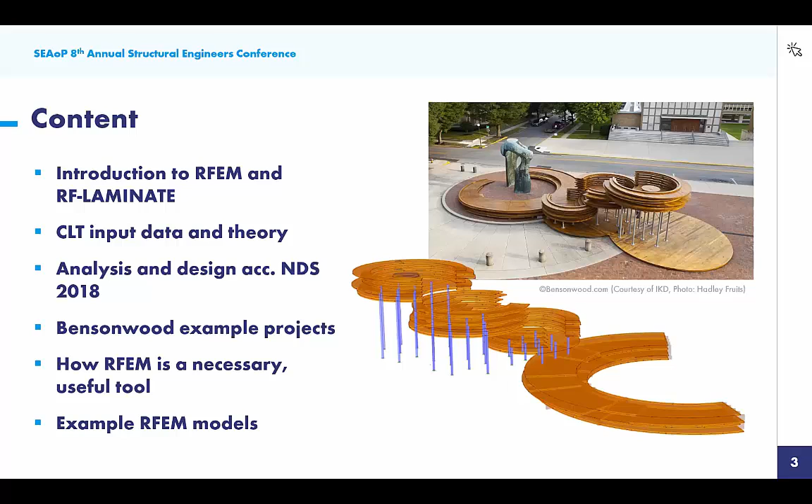Then I'll turn it over to Florian, who is an engineer at Bensonwood, to show you some real world applications of cross-laminated timber, mass timber, with some example projects that they have worked on. He'll go on to talk about how they found RFEM to be a necessary and useful tool in these projects and go through a few example RFEM models as well.

So I am going to go ahead and begin within our program RFEM. You can see that this is the main structural analysis program here, RFEM. It will provide a full analysis, so things like internal forces, deflection, support reactions. We work with this add-on module concept to provide design of our elements, and today we'll be looking at RF-LAMINATE, which provides design of cross-laminated timber.

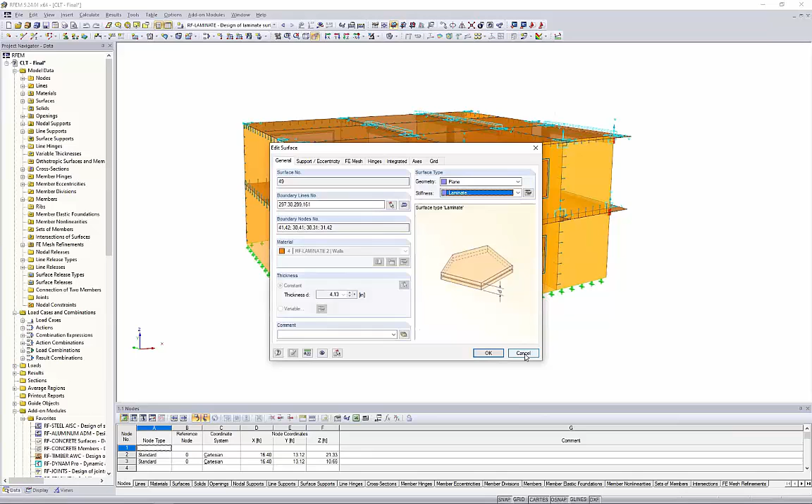For the sake of time, I have already modeled a two-story structure here, and you'll notice that we have several surfaces, and if I double click on one of these surfaces, the stiffness type is set to laminate. This refers to our RF-LAMINATE add-on module, which we'll get into in just a minute, on how we can accurately calculate the stiffness properties of CLT panels.

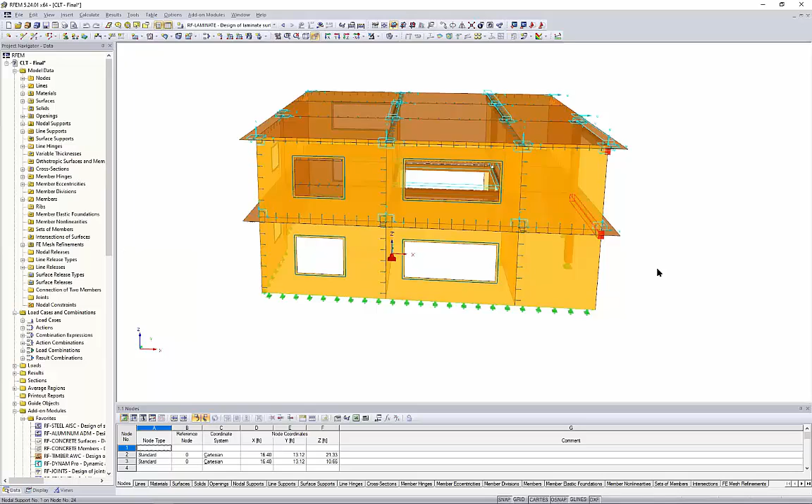I've also combined this with member elements. So you'll see here glulam beams, which are dropped down below the bottom of the surfaces for additional support. We have some glulam columns as well, all within the same project. I've also applied loads to this structure. These are just general surface loads.

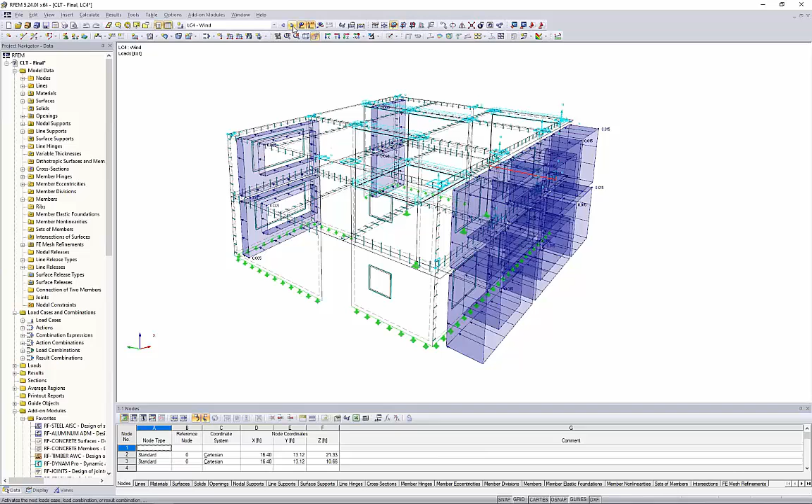Maybe if I turn this to wireframe, it's a little bit easier. We have a dead load applied to the first level and the roof level, a live load, a simple snow load applied at the roof level, and then a lateral wind load. I combined all these load cases into load combinations according to ASCE 7. So when we display these together, you'll see the gravity loads in addition to lateral loads acting on the structure altogether.

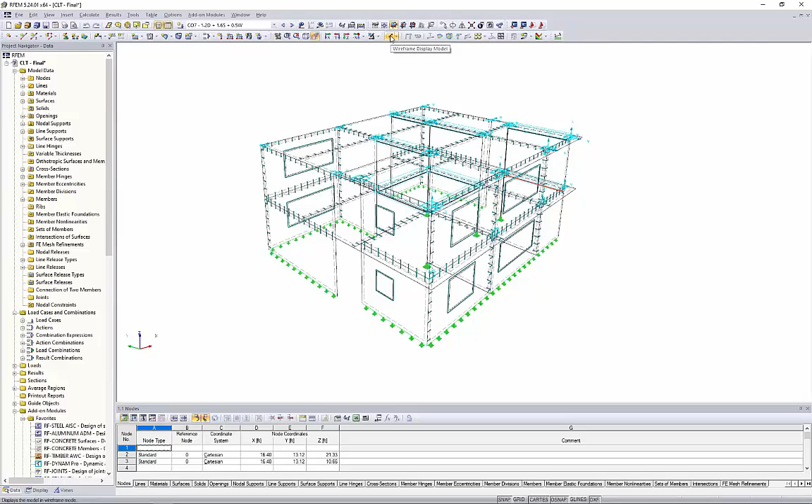Before we run this initial calculation, what's required is to define the correct stiffness types for our cross-laminated timber. For this, we would utilize the add-on module RF-LAMINATE, which I can access within my project navigator on the left. And when I say add-on module, it's really nothing more than a dialog box that pops up within our main program. So before I give you a quick tour, let's jump back to the PowerPoint to see what's happening behind the scenes with this add-on module and how it's working with RFEM, the main program.

We know with cross-laminated timber that this is going to be individual layers oriented 90 degrees. Each individual layer has its own stiffness properties, so modulus of elasticity, shear modulus. In turn, these individual layers have their own stiffness matrix as well. So this is what we're eventually going to be defining within RF-LAMINATE, these individual layers.

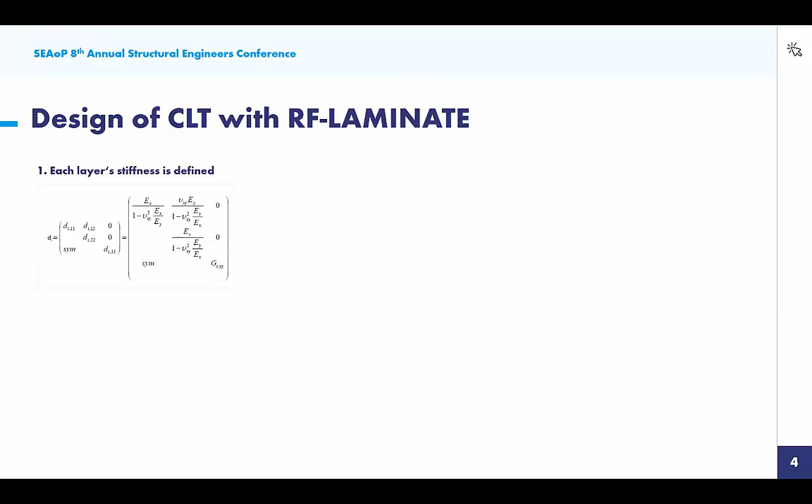What we do with these individual layers is create this overall panel. And what's required for this panel that we might use for a wall element or floor element is to generate the overall stiffness matrix. We call this the global stiffness matrix of this panel.

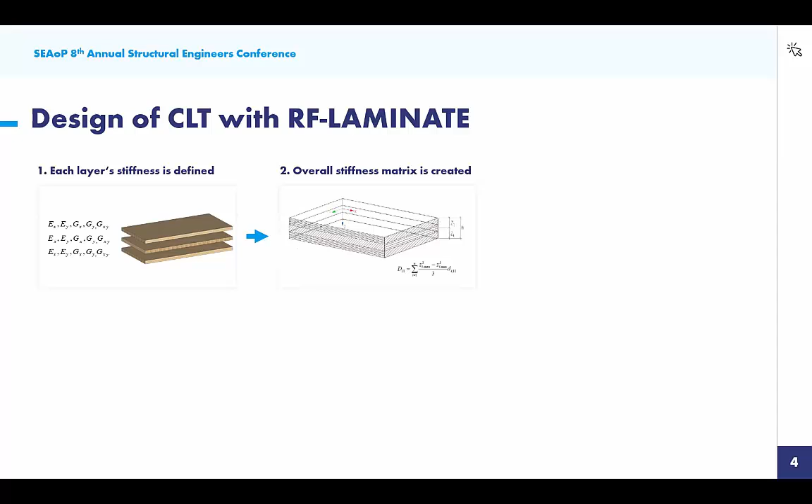So RF-LAMINATE will automatically do this in the background with what's called the laminate theory. You might see here a sample calculation for the D11 entry of that stiffness matrix. We take this global stiffness matrix and export it from the add-on module back into RFEM. So we're talking about that structure we were just viewing, and we can go ahead and run the analysis.

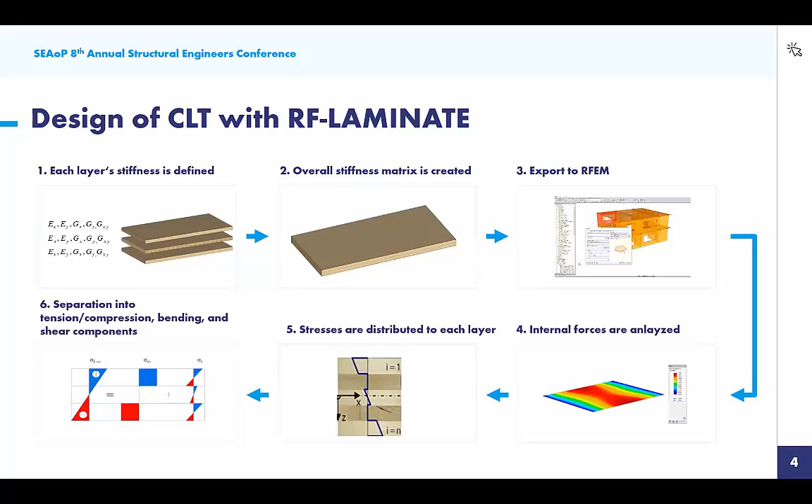Now, if we take a cross-section of our CLT panel, we might see the stress distribution look something similar to this. From here, we separate out all of these stresses into tension, compression, bending, and shear components. These stresses from the analysis are ultimately what we're comparing with our design stresses, or limiting stresses, based on the material as well as on the NDS code. From this, we finally get a design ratio for our CLT panel. So that's what's going on in the background.

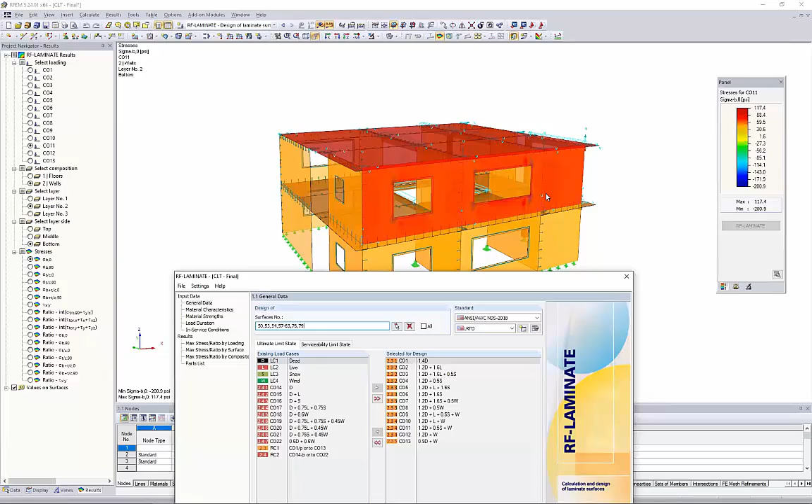Jumping back to RFEM, just to give a quick tour of what this add-on module requires for input, you can see that I can choose the surfaces that I'd like for design. Currently, I've only selected the roof panels as well as 3 wall panels. We could design all at once if we wanted to.

Over on the right-hand side, we choose our design standard. You can see the NDS; recently the NDS added CLT design with the 2015 standard. We also have the 2018 standard. We have the Canadian standards, because that was recently implemented there, and then, of course, the Eurocode.

For the ultimate limit state design, we would likely move our LRFD load combinations over here to the right, simply because I'm choosing the design method according to LRFD. Notice ASD is also available here. We also can check serviceability for these panels.

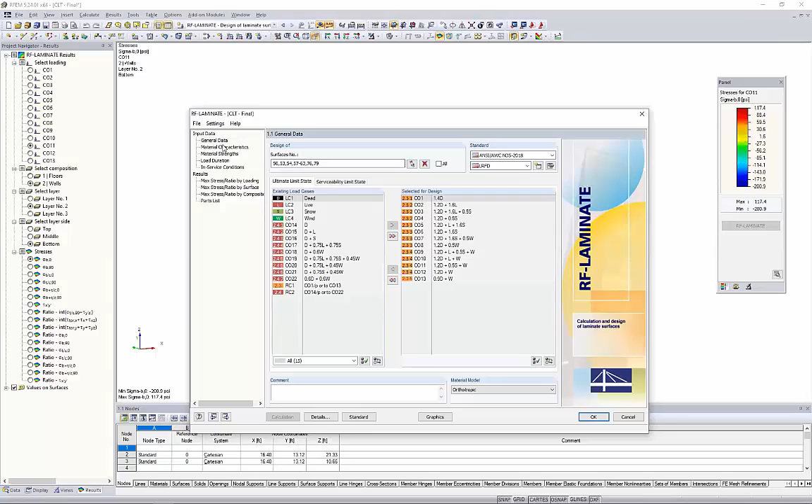So we're talking deflection checks, and I'll show you a little later where we can set that limiting deflection ratio. For this simple example today, I'm not doing deflection checks, but we'd probably move these unfactored ASD load combinations over to the right-hand side. So it's really as easy as moving down these tables from top to bottom.

Let's take a look at this next table, material characteristics, which relates back to the PowerPoint model where we're defining the individual layers for our CLT panel. For the first layer, we can access our material database and use our filters on the left to filter to timber. We might choose North America.

We could choose the NDS 2018, and here's just about every timber material available within the standard, and of course all of the relevant material properties. You can use these search functions if you need to as well. Once you've determined the material for that first layer, we would select it.

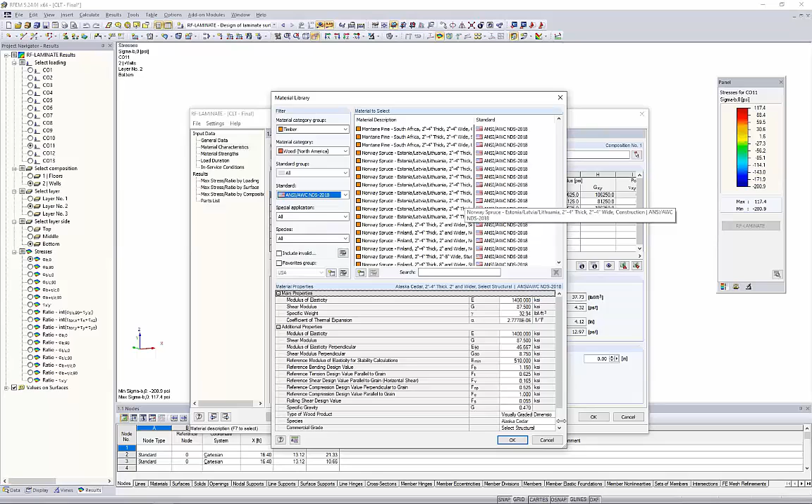You would input the thickness, and notice in this third column is the orthotropic direction: 0 degrees, 90 degrees, 0 degrees, and so on. That's the definition of CLT, orienting the layers 90 degrees from each other. Then we get the modulus of elasticity and the shear modulus automatically brought in from the material database. We'd continue to do so for additional layers, and this might be for a custom layup, a custom CLT composition.

We could save these layers so that we can always use them in a future mass timber project within RFEM. The other option is to import the layers from the library. Within this option, you can see a drop-down box of various manufacturers.

When we're talking CLT from the North American market, some names that might sound familiar: Nordic Structures, SmartLam, Structurlam, and then we just have the general PRG 320. For example purposes, we might move forward with PRG 320 CLT according to the US.

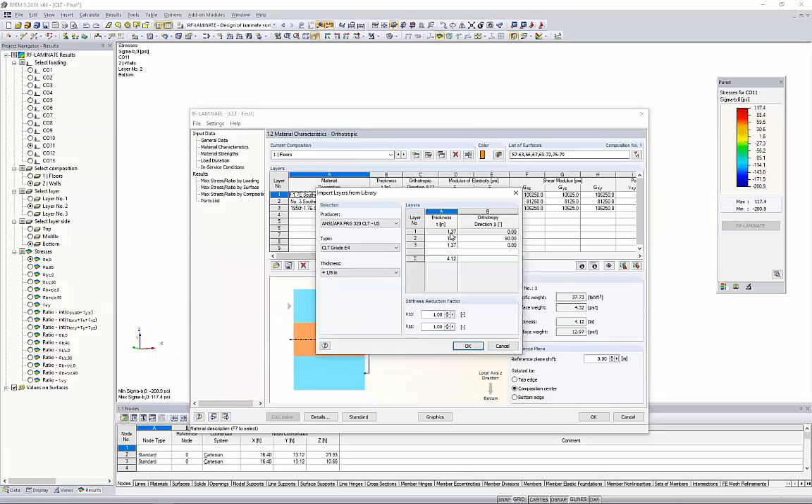So once we select our manufacturer, we would choose our grade from the drop-down. We would choose our thickness, which is going to influence the number of layers for our CLT panel. But notice that the layers are automatically brought in, the thicknesses, the directions. And when we import that in, this entire table will be filled out for us based on the manufacturer's products. So just another option if you do see your manufacturer in there. Otherwise, you can create those custom layups and save them to your library.

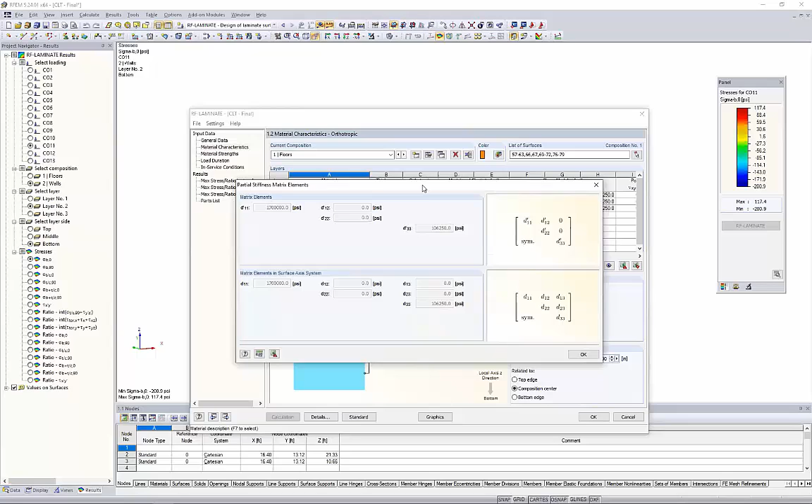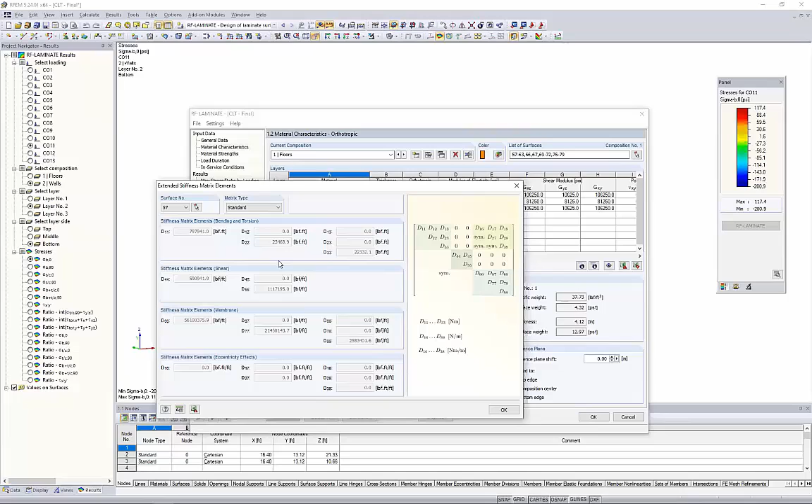Now, again, relating back to the PowerPoint, each one of these individual layers has its own stiffness matrix. So we can actually view the individual stiffness matrix here for that single layer. Well, the program takes it a step further, of course, and it calculates this global stiffness matrix for our panel. So if you're not utilizing a program where you can individually define these layers, you're going to need to put in the global stiffness matrix into your relevant FEA program. So this might be something that perhaps you get from the manufacturer, but ultimately this is the information we need to export back out to RFEM.

So you can see here that I named this composition floors, and I've applied it here to all of my surfaces that are my floor elements. And we can create different compositions for the roof versus the first floor. That's all possible. Exact same concept for my second composition here, my wall elements. And this time I also just have 3 layers for my wall elements. Perhaps we have 5. You can see that I've applied these to all of my wall elements back in the RFEM model.

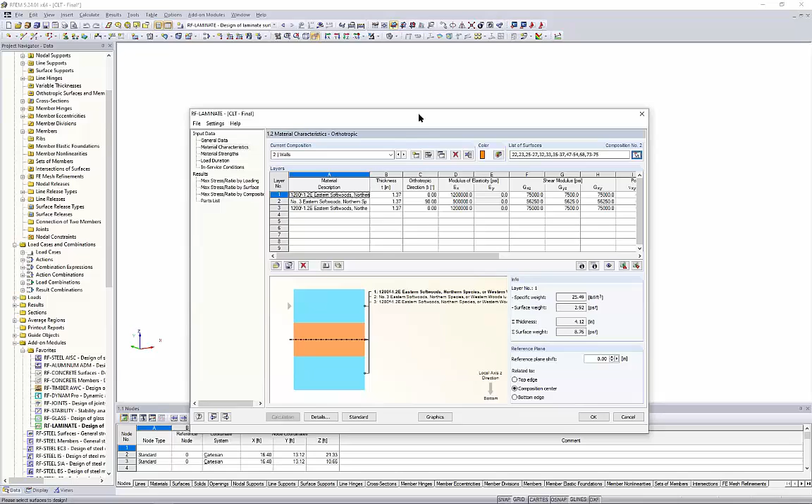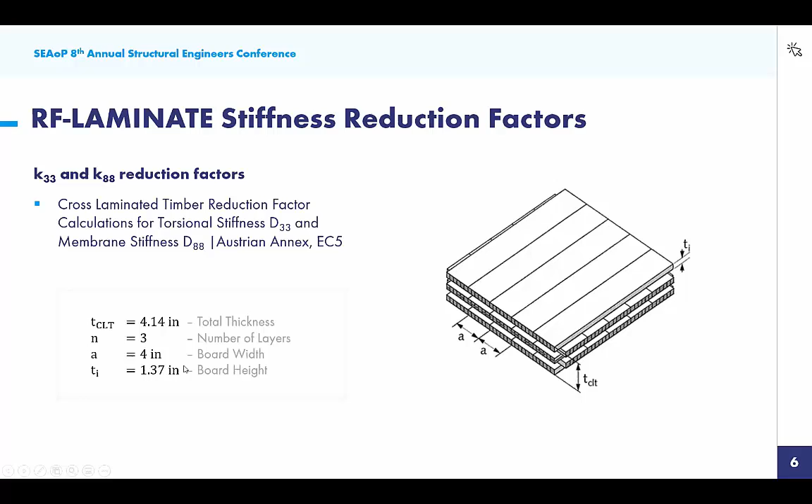Again, directly from the standard, it's laid out quite clearly how we need to reduce the stiffness when we don't have that edge bonding. So we take all these variables from the previous slide and from our table here, and we're ultimately calculating K33 as 0.435 in our example today. Well, this is the information we apply directly in the program under those composition details. Same concept for K88. We're going to apply those directly here.

Now, for some of the manufacturers, these values are included if they don't have edge bonding. For others, maybe we weren't able to get this information. So always just something to double check for your particular project, your manufacturer, and which CLT panels you're using. And again, not specific to RFEM, but this would be a stiffness reduction you'd want to apply with your own analysis tools.

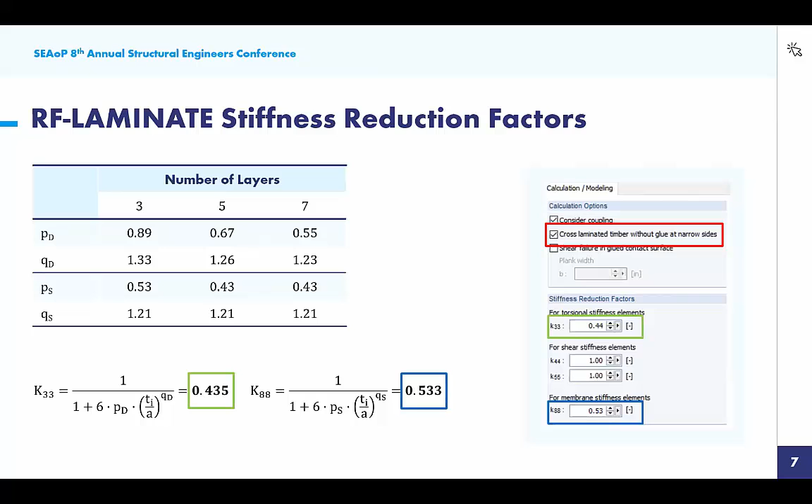The final consideration here for these check boxes up at the top is shear failure in glued contact surface. And this actually all relates to torsion. And we're really mostly concerned with torsion when we're talking about CLT wall elements loaded in plane. We're probably not so concerned with torsion when we're talking about floor elements, for example. Now, this really is also only a concern when we don't have glue at the narrow sides again. So this first checkbox must be checked. That will make this third checkbox available here that we can go ahead and take a look at torsion considerations.

Just a small tip, it's really important to set the FE mesh back in RFEM. So our FE mesh settings for the length approximately equal to the board width. So in our case, that would be 4 inches, just for the most accurate analysis.

Now, once again, the NDS standard, the CSA standard don't address torsion whatsoever. So we refer back to the Eurocode 5, the 2010 version. I think we're all kind of in agreement that the European standards have been doing cross-laminated timber much longer than what we've seen here in North America. So it's pretty safe to say we can refer back to these standards for considerations such as torsion.

And once again, complete interaction equations given quite clearly directly within the standard, and we can see those interaction equations in the lower left corner here. And this includes 3 different terms. The first term can be shown over here on the right-hand side, the second term lower right-hand side, and then the third term would be those internal forces and stresses directly from the RFEM analysis to ultimately give us our design ratio for torsion for our wall elements.

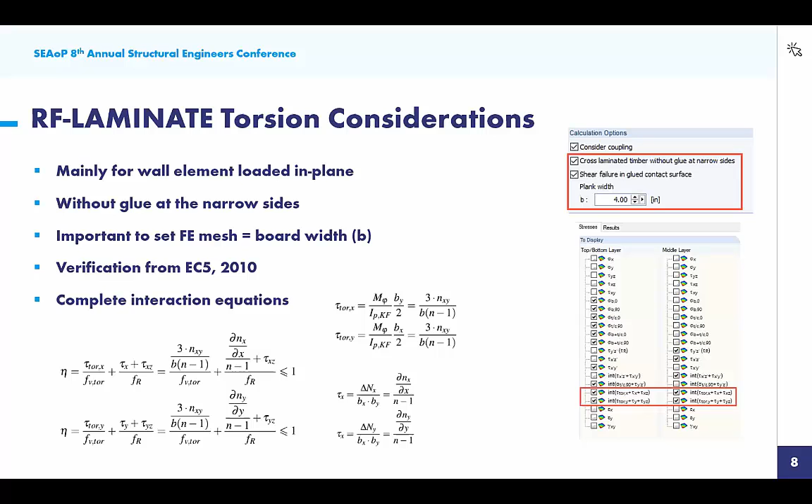Now, over on the right-hand side, you'll see that we have all of these different stresses available to us within RF-LAMINATE. And it's pretty overwhelming. So what we've tried to do is to just only check on the check boxes that are relevant for CLT design. Now, this includes the top and bottom layers as well as the middle layers, and torsion is actually not one of them that we have checked on by default. So I'll show you in just a minute how we can go ahead and turn those on in order to take that into consideration for our results that are being shown.

So we'll go back to RF-LAMINATE. If you remember way back when, we still have this dialog box open, and we're currently looking at my wall elements, and we are considering coupling. We don't have glue at the narrow sides. We are concerned with torsion, so we want to go ahead and put in here our plank width or our board width equal to 4 inches. And just like I showed in the PowerPoint, I calculated K33 and K88, which I'm inputting in here as well.

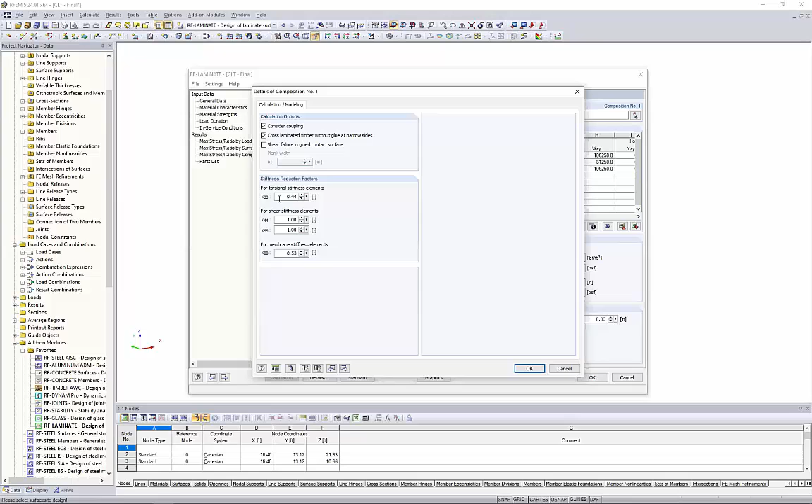So for my floor elements, if we jump back to those, same exact concept, but I'm not concerned with torsion here. So we can leave that option checked off, but we're still applying that stiffness reduction factor K33, K88. So once we have input in all this information here for those material characteristics, we can just jump down to our next table, material strengths. Really not much to do here. Everything is brought in from that material library. It's just showing us the strengths for bending, tension, compression, and shear.

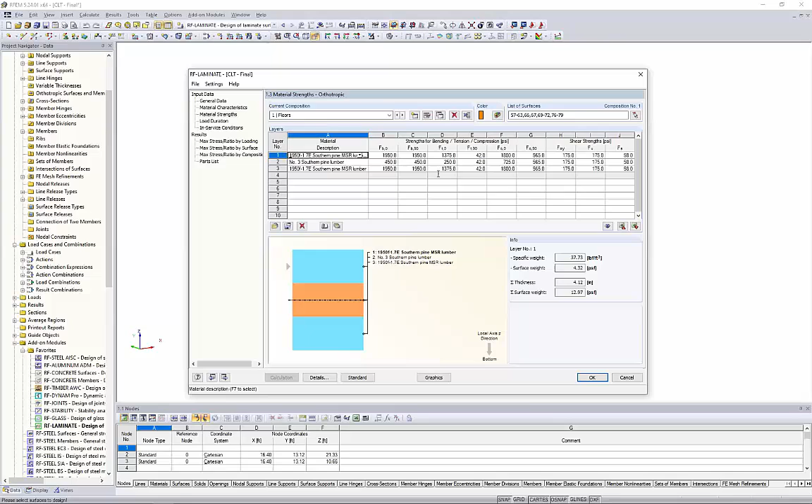So this information based on the material itself, the material properties, in addition to the NDS factors, is what's going to give us our limiting stress values. And so when we're talking the NDS factors, we might be looking at the load duration factor, which we can see is set within this next table. So dead, live, snow, wind, we would set the load duration factor here. In-service conditions, is your CLT panel dry? Is it wet? What is the temperature it's sustaining? And all of these factors are actually found under the standard tab. So we can see here the relevant factors that are going to be applied for the design purposes.

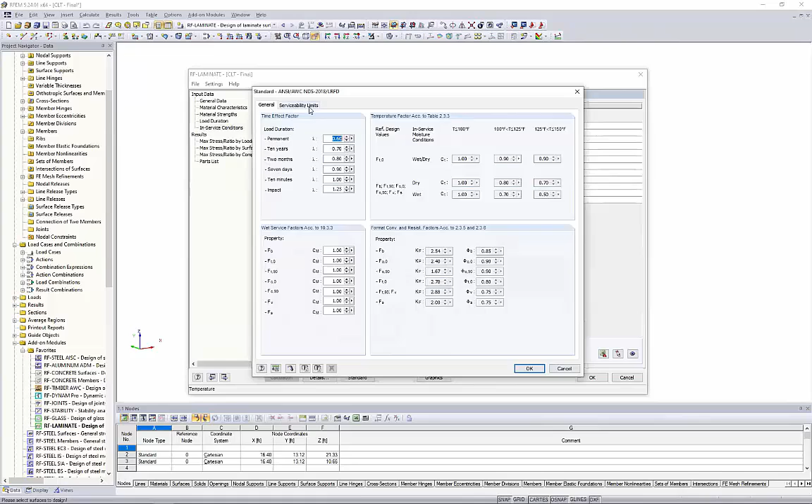You'll also notice the second tab here, serviceability limits. That's what I was talking about. We also can check deflections where we set this limiting deflection ratio directly within the program. We're not checking serviceability today, so this isn't applied, but just to let you know it is available.

So before we're ready to run our calculation, remember I wanted to turn on the torsion checks, so we can do that under the detail settings. And once again, here's this long list of all these different stresses that we can compare and give design ratios. Way too overwhelming. So we have just the default settings here, which likely is going to be most relevant for your CLT design. But here in kind of the lower portion is where we can activate the torsion checks as well.

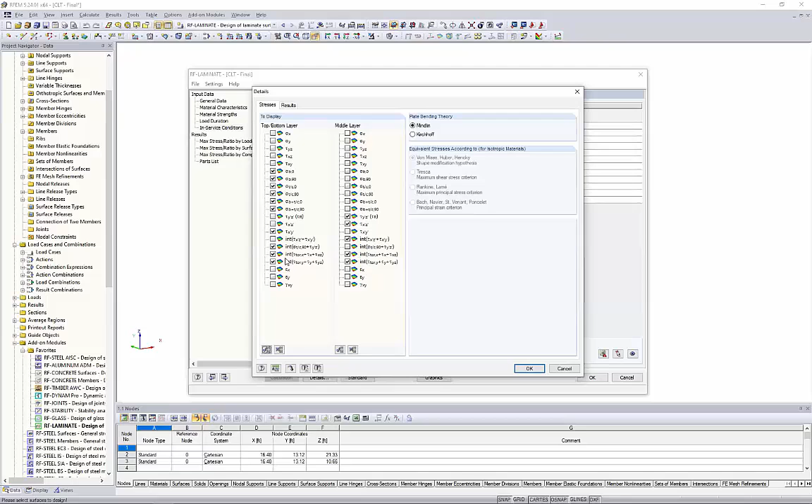So we're almost ready to run that calculation, but before we do so, let me jump back to the RFEM program. And again, this is just our main structure, and you'll notice that we have all of these blue symbols shown everywhere. So we might be wondering, well, what are these used for and why are they relevant? And again, incredibly important for the true properties here of our CLT structure.

So let's begin with a couple of adjacent panels, and I'll highlight these and we'll take a look at just the visibility by these selected objects. So two CLT panels side by side, and I'd say in most FEA programs when we're modeling two surfaces side by side like this, the program is going to assume that we have a fully rigid connection between these two panels. And we all know with CLT design that that's not the case. Rather, we're going to be utilizing some type of screw connection maybe, where we kind of have this partially fixed connection, but definitely not a fully rigid connection.

So that's why we would utilize in the program what's called a line hinge. So when I double click on this line hinge, you'll notice I have the ability to fully release the moment between the two panels. So that's probably one consideration we want to take. We also have the ability here along the joint length to set some type of spring constant, and this might be for the slip of those screws between the two panels. For my example today, I set this to 50 kips per square foot, but this would all be relevant to the type of CLT connection that you're using for your projects.

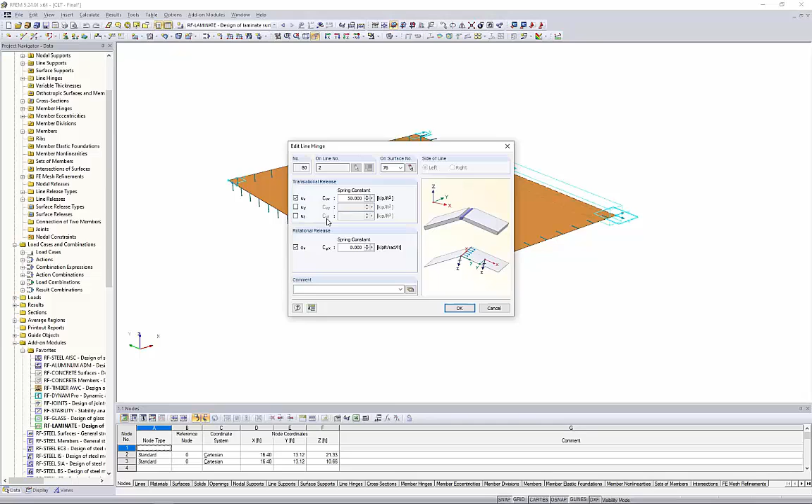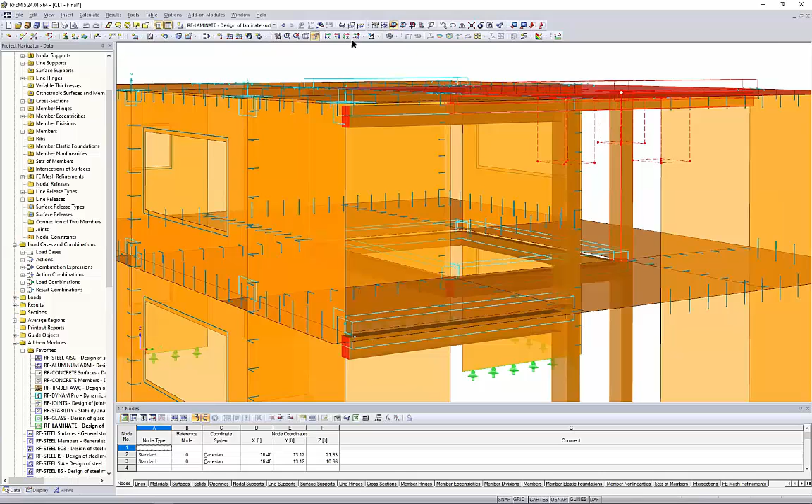The other 2 degrees of freedom here, translation in the Y and Z direction, are left at fully fixed. So this is definitely something that you need to apply, and this is why you're seeing, when I cancel out of this visibility mode, these line hinge symbols shown everywhere throughout the panel connections. The other symbol that we're looking at here are these long blue lines. And for this, let me go ahead and create a user-defined visibility here, just so that this is a little bit more clear.

Similar to our adjacent panels, we have these beams drop down below the CLT panels for additional support—these downstand glulam beams. Similar to what we saw with the CLT panel connection when they're adjacent to each other, this assumes a fully rigid connection between this beam and the CLT panel. But we know that's not the case because of these screw type connections.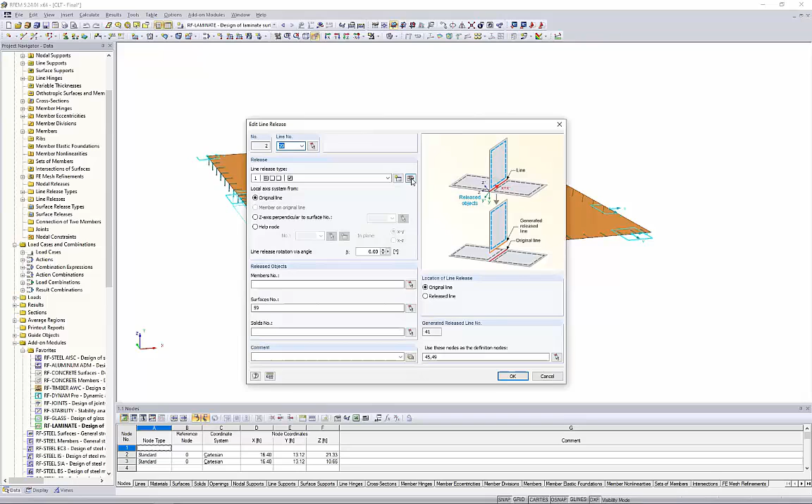So we need to adjust this fully rigid connection, and we do so with what's called a line release. When I double click on this line release, it's actually very similar to a line hinge, just a bit more applicable to beam to panel connections. With this, we can define the line release type by releasing the moment, as we can see here.

We're also going to apply that stiffness slip to the joint along the local x-axis of the line here, so 50 kips per square foot. The other two, we kind of leave as fully fixed.

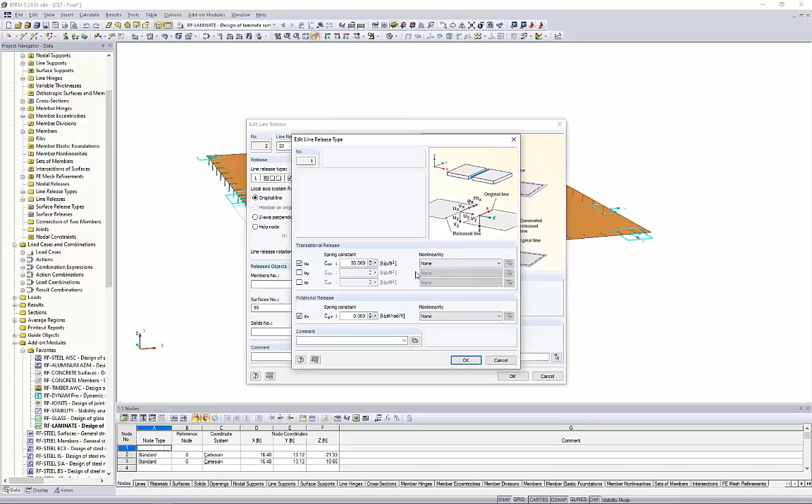Another advantage of a line release over a line hinge is the ability to define nonlinearity—you'll see friction, partial activity, and so on. Where this might be relevant is in the vertical direction. Maybe we have a scenario where we'd like full force transfer when the CLT panel bears down on the member, but in the event of uplift, we want that completely released. That's all possible with these nonlinear applications.

That's kind of why we have these line release definitions everywhere a beam connects to the panel above it.

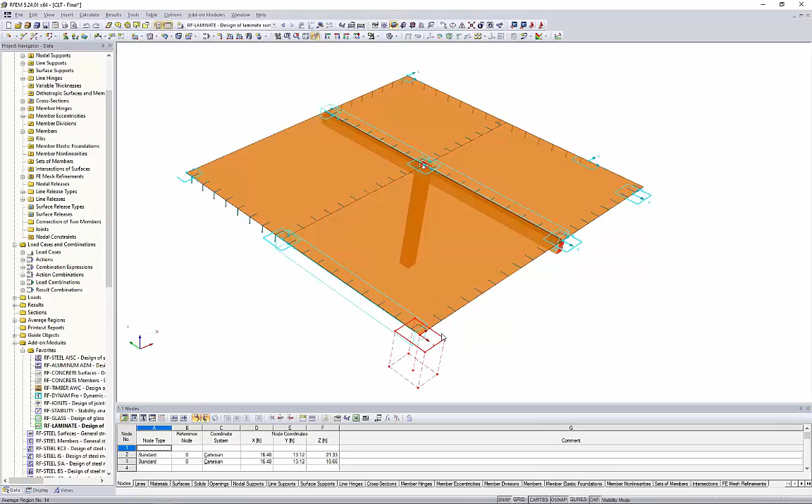Now the final application here, which we'll notice, is these rectangular blue squares. These are going to be used for singularities. And where might we see a singularity?

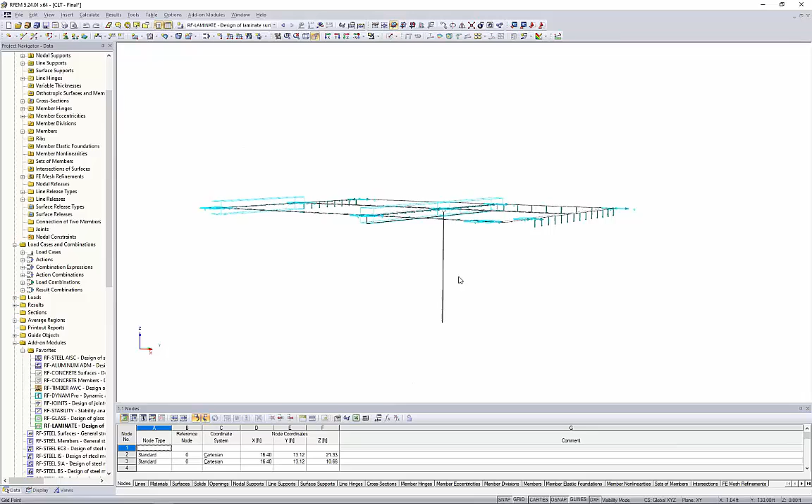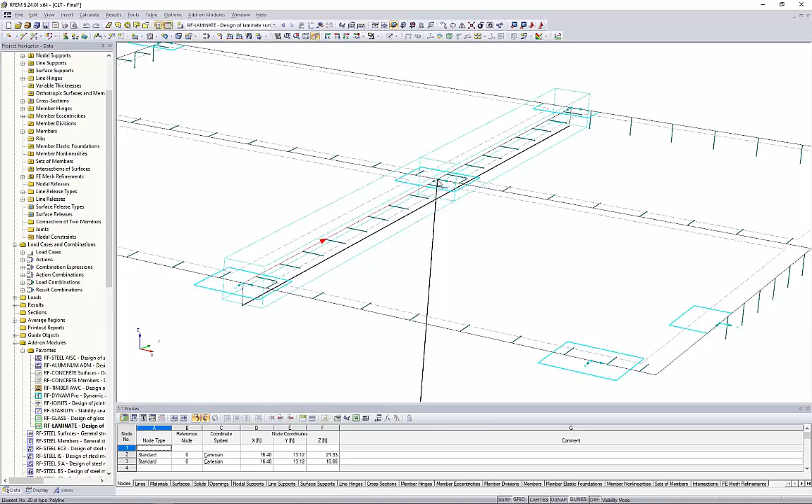If we convert this to a wireframe view, we know from general FEA programs—not just RFEM, but all programs—that members are represented by single line elements at their centroid. So this column is just a single line element framing into these 2D surfaces at a single tiny FE mesh point. You can imagine the stress or internal force spike at that single point, simply because we don't have great load distribution. This isn't unique to RFEM; singularities happen in all FEA programs, so you have to find some approach to level them out.

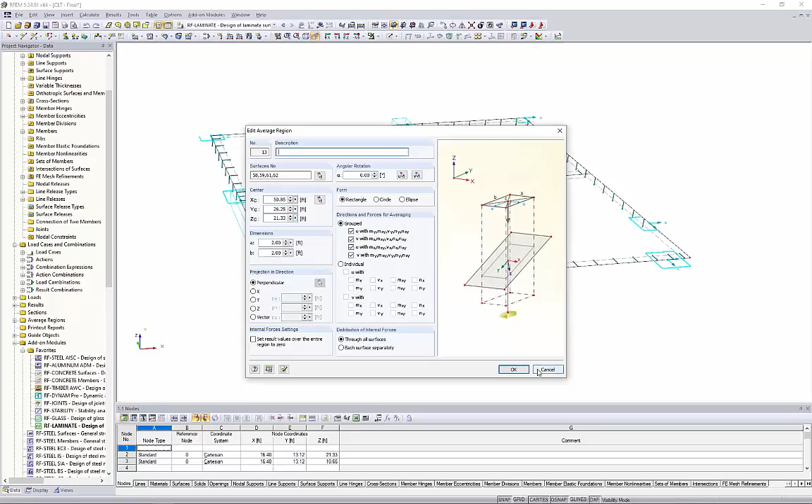In RFEM, we can apply what's called an average region at these locations. An average region is exactly what it sounds like—it averages out the forces over a specified dimension. I've set here 2 feet by 2 feet, averaging the forces in all 4 directions, which smooths out those high peak forces and stresses that we know don't really exist in real life but aren't avoidable in FEA design.

That's another application of why we have these average regions shown within the structure. Canceling out this visibility mode explains why we're seeing all of these blue symbols everywhere. These average regions can also be taken into consideration within the add-on module RF-LAMINATE.

Once we've applied all these line hinges, line releases, and average regions where necessary, we're finally ready to run the calculation. We hit calculation within our add-on module, and we're presented with results in table format, where we can view the max stress ratio by surface, for example.

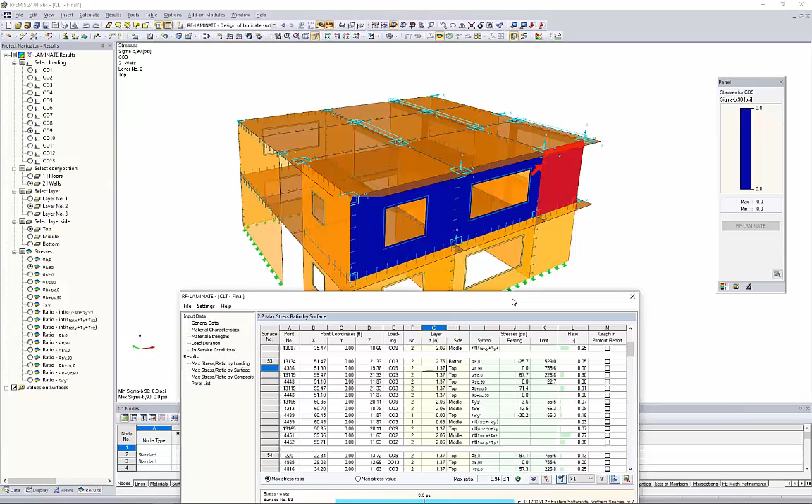If I pull this down here, as I scroll through the table, everything's synced up in the background to highlight the surface I'm looking at. It might be a little difficult to see, but there's a red arrow pointing exactly to where my controlling stress point is for that particular check—a nice feature for seeing, relative to the table, exactly where we're at in the structure.

Taking a look at the actual data presented in this table, this is where we're going to see each individual surface in each one of these categories. We're going to see the bending stresses, tension compression stresses, combined bending, tension, compression, as well as shear. This does include rolling shear checks as well.

And remember those torsion checks that we've also activated. So within column J here, we're seeing the existing stresses, purely from the analysis, which if we remember back to the PowerPoint, we're bringing in these stresses and separating them out to each layer into bending, tension, compression, and so on. Column K here is going to be the limiting stresses.

This is just based on the material as well as the NDS standard and those factors being applied. Ultimately in column L, this is where we're getting our design ratio. We can go ahead and filter this information, export at the click of a button in Microsoft Excel if we need to sort further. But ultimately, we're seeing a max ratio here of 0.94 for our example today. We have our green smiley face because it's less than 1.0.

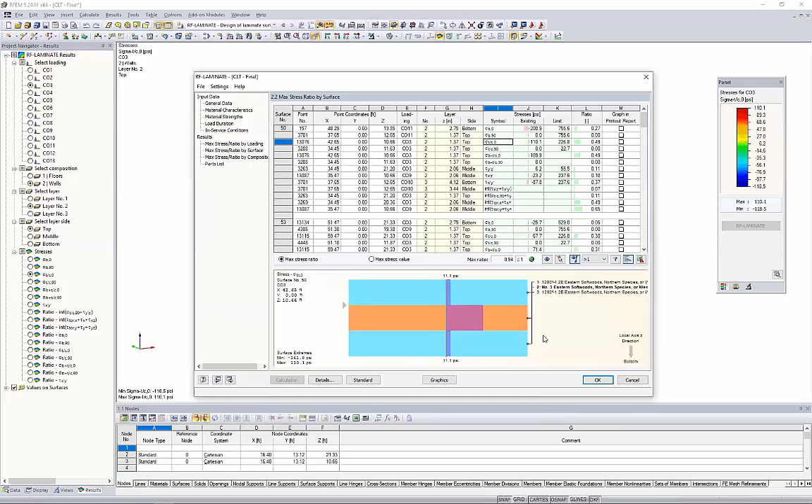As we also know from the PowerPoint, I talked about the stress distribution for each of the layers. We can see those stress distribution diagrams shown here as we click through all of these different applications for each one of the surfaces. So in addition to all of this information being shown in table format, we can always jump to the graphics view here. This is the results from RF-LAMINATE.

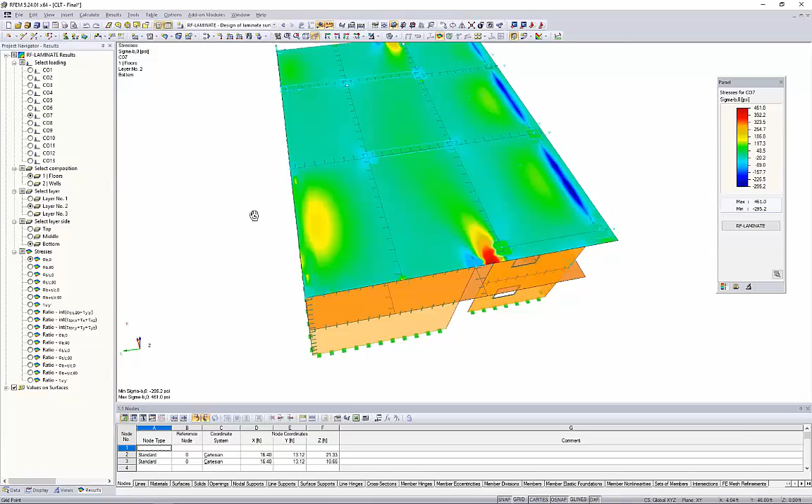We can see it selected here within our drop-down box. We're just viewing them graphically back in RFEM. We can scroll to the different load combinations here if we're interested in those results. We can take a look at our wall elements, but we can also switch to our floor elements. And with these additional options here, we can also take a look for our floor elements.

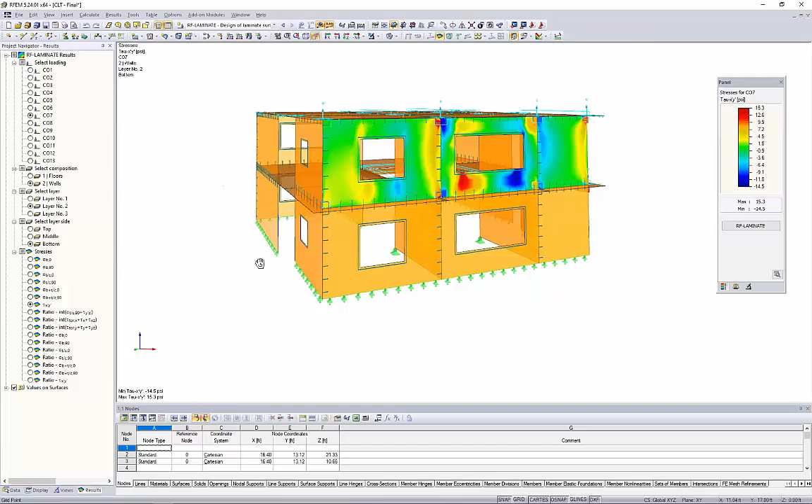We might be interested in the bending stresses, for example. We can also take a look at the tension compression forces. Shear, of course, is something that we're also considering. Jumping back to our wall elements, we're probably most interested in shear. Things like tension and compression are also shown available to us. And of course, we can view the design ratios in color formats as well.

We can print off these pictures into our printout report and take a look at the results in just something other than table format with numbers. So hopefully this was just a quick introduction to CLT design. Some of this information that we're taking away from this first part of this presentation into your own programs or your own design methods is consideration of that global stiffness matrix. Do we need to reduce some of the entries such as D33 and D88 if we don't have glue at the narrow sides? And then also back in the RFEM model, things like line hinges to make sure we don't have a fully rigid application between adjacent surfaces, line releases, and so on.

So with that said, I will go ahead and turn it over to Florian for the second part of today's presentation.

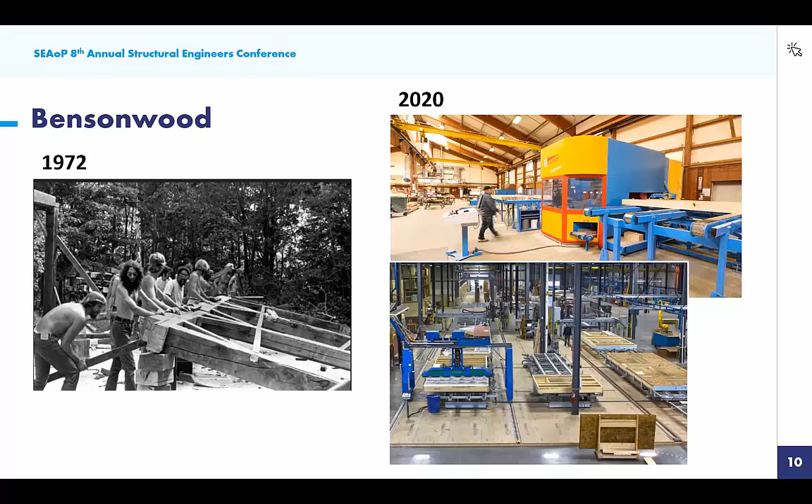And the lower picture is our panel shop that we opened in 2017. Again, it's highly automated. The panels get built, and they get transported through the shop on some kind of car, and they just move along. The nailing is automated, and on the left you can see where the cellulose insulation gets filled, and then a little later in the shop it gets put upright, windows get installed, and yeah, that's what it looks like today.

All right, enough about Bensonwood.

This is the first project that I wanted to show. This is called the Conversation Plinth. It's more of an art project than it is a building. It was open to the public - you were able to walk on there, and you could stand on top. But it was just a temporary construction. It is CLT, and it's not really protected - it's outside, so it was just a temporary installation. But of course, it had to be fully calculated because people were using it.

The project is made out of hardwood CLT, which is pretty unusual. But there was an initiative in Indiana to promote the use of locally grown hardwood, and so they came up with this installation and came up with a custom layup of a hardwood CLT.

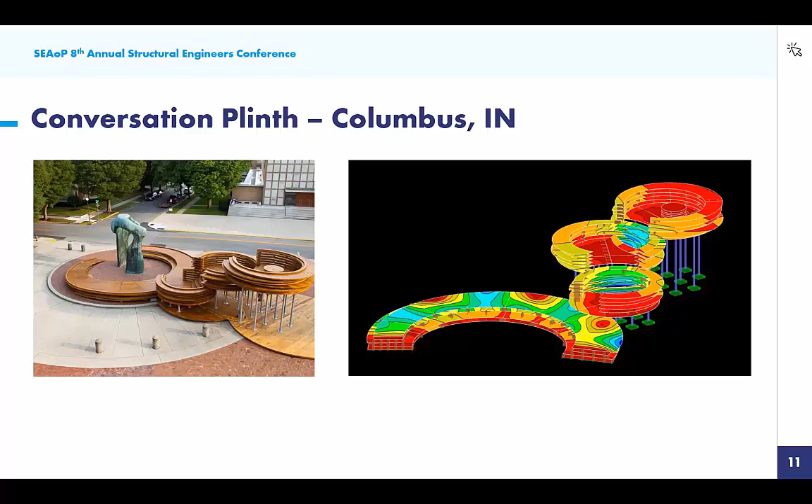All right, I think that's it about that project. The next project I would like to talk about is this Haus Gables in Atlanta. The architect on this is Jennifer Bonner. Again, when this was designed, she had in mind to really celebrate the use of CLT, as you can imagine. So everything in that building is basically CLT.

So the walls, the roof panels, the floors, partition walls, even the guardrail for that balcony. She was really trying to use it as much as possible and kind of test out what's possible to do with this somewhat new material, I guess. There are no beams in this roof structure or in the floors. It's all CLT floors that support themselves, and then there's some walls, but especially in the roof, you can see how this could be utilized.

The only steel beams are in here. You can see those too, because the span was a little too long and the wind deflection didn't quite check out. There's no floor behind this. We didn't want to increase the wall thickness just because of that one situation. So we have 2 steel beams in there, but everything else is just CLT panels.

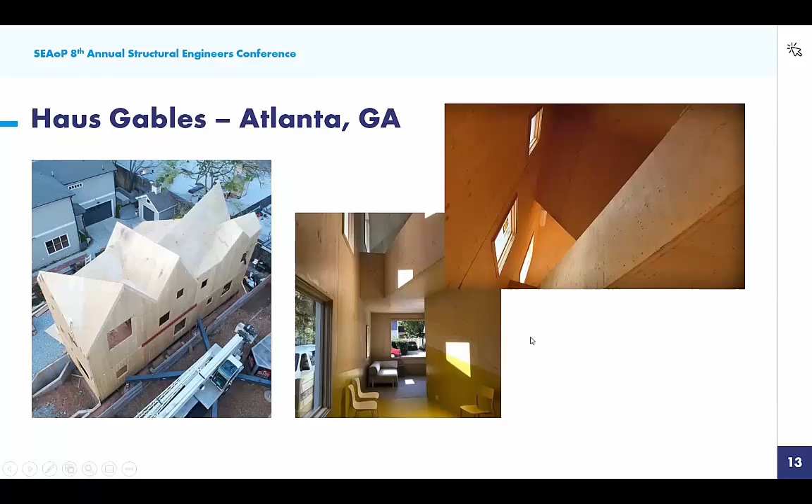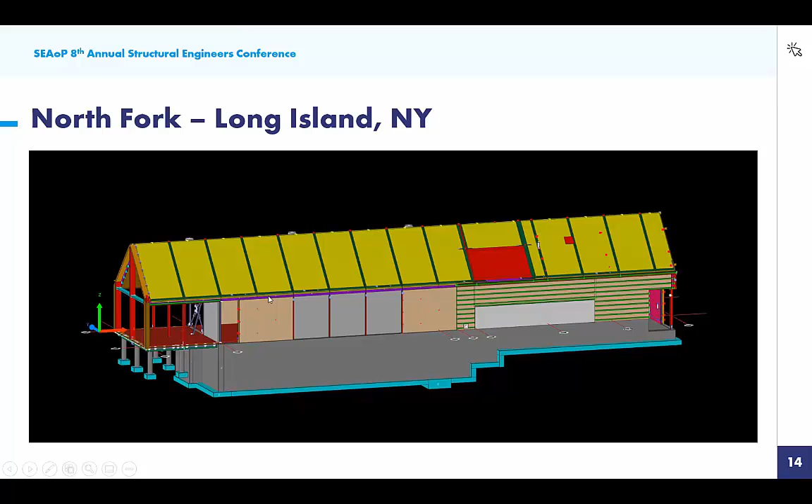This is a project on Long Island, and it was a collaboration with Lake Flato, the architects, and what we were trying to do here is, maybe I'll skip a little bit ahead. So this centerpiece, from here to about there, there's no floor inside, and they didn't want any tie rods in there. Moment frames didn't seem feasible, and obviously spanning a ridge that long wasn't really an option. They just wanted to have one great open space.

It's about 50 feet long, and so what we came up with is using a CLT panel in the roof, which you can't see in this picture, and stitching them all together and creating this as a deep beam diaphragm. So you wouldn't need any tie rods or moment frames; there's just these braced frames at the end to take all the wind load and all the outward thrust that needs to get resolved from here to the end.

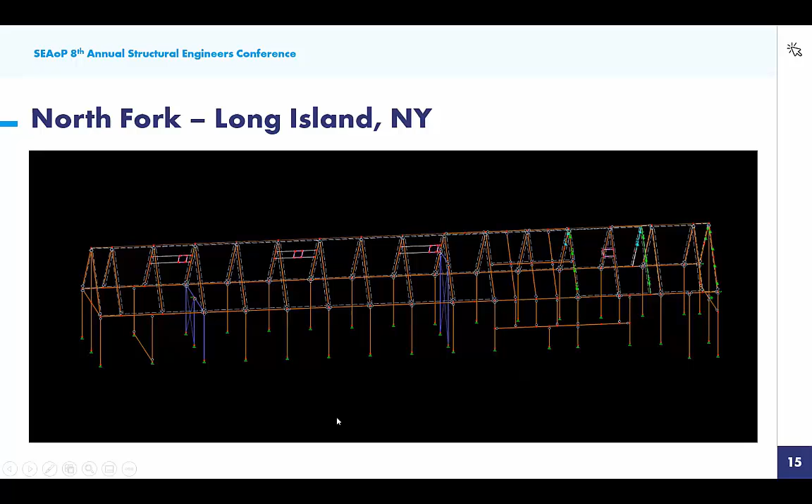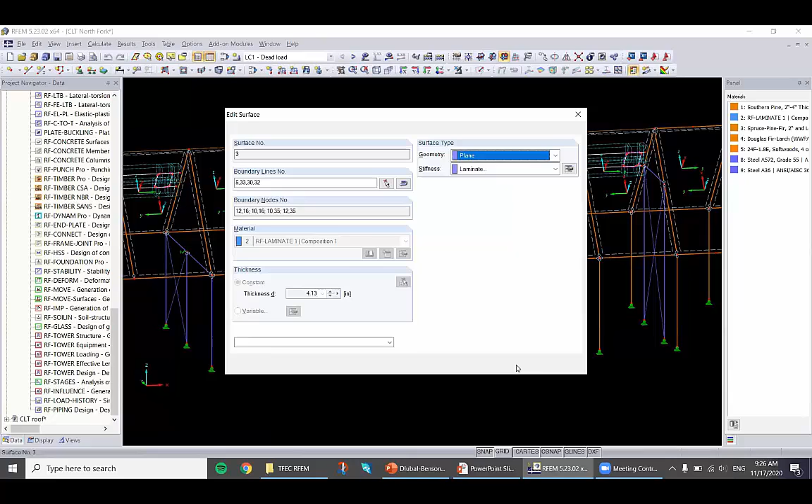This is the CAD model that we used, and then this is the RFEM model. And for this project, I'm actually going to switch over here. So that is the actual model. I did also work on that, so I can talk a little bit more about this one. I'm going to open one of those panels. As Amy explained earlier, we're using the laminate module here, so the whole build-up is defined in the other module. I'm opening this to show how those hinges work.

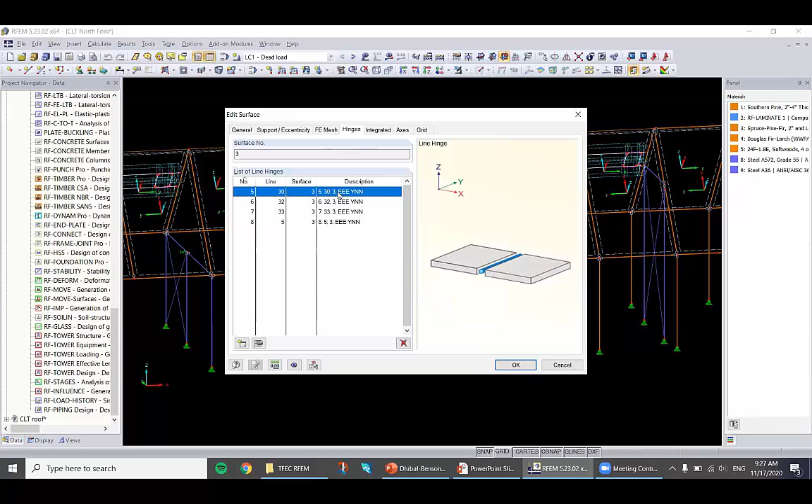So on all four sides of this panel, there's hinges defined, and then the rotational release is always set to 0 because obviously there's no moment connection there. And then we went so far as to define all 3 of the other connections with springs.

This is a little bit of a process, but it's very important to get that right because it has a lot of influence on the stiffness of the whole building and deflections. The way we did it here is we would build the model and have all this set to infinite stiffness, and then just run the calculations, look at the forces that are there, and then come up with a screw size and screw spacing that would work.

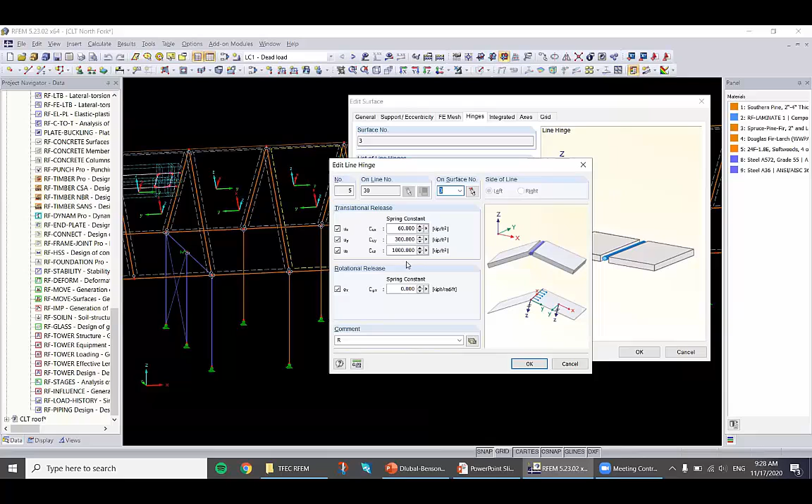And then we put this into an Excel sheet, and then look at the stiffness that would provide, and then put that stiffness into those boxes, run the calculations again, see if the deflections and the forces check out, and do this for a couple of iterations till we're happy, till we don't feel like there's a ton of screws, even though there are a ton of screws, and the deflections are still acceptable. That kind of process needs to get done for a lot of those connections.

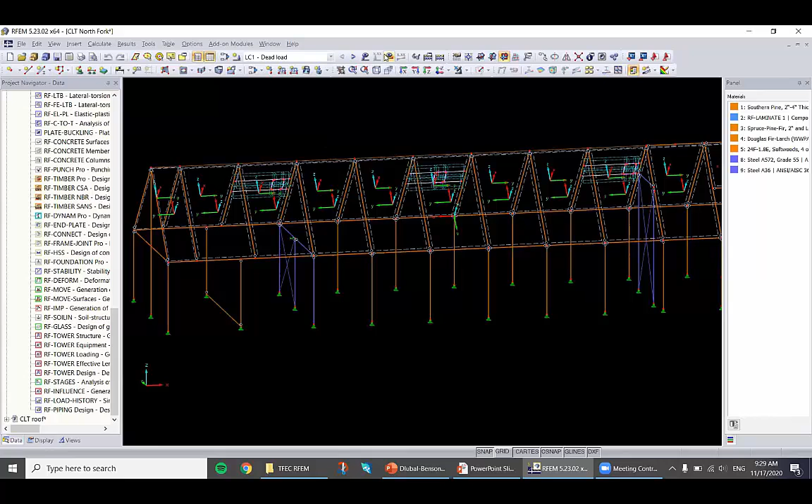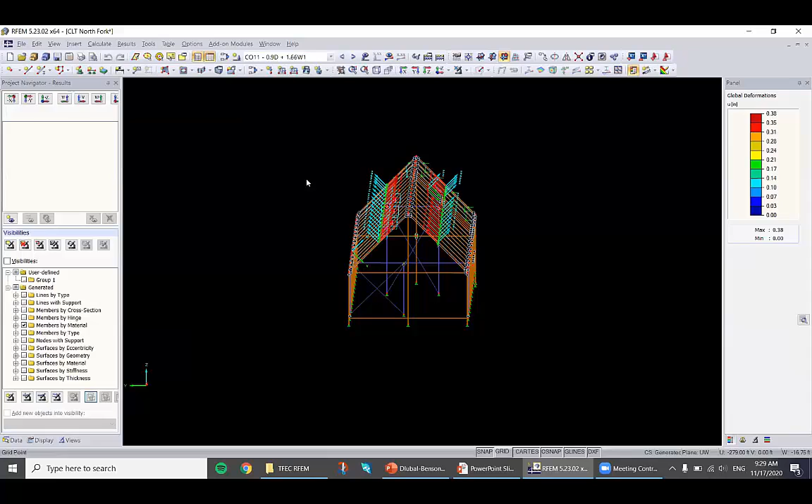This one here is different because we're collecting a lot of the load along this one where the braced frame is. I'm going to show some results. What I found most interesting is the deflection of this. That was our main concern. You can see it's on Long Island on a bluff, so the wind loads were pretty significant. Unfortunately, there's no results for this one.

Yeah, so you can see the results here. We analyzed the whole building as in one model, which we usually don't do, but in this case, there was just no way around it. And you can see the drift that we're expecting here is about 3/8 of an inch, and that's also what we wanted to limit it to.

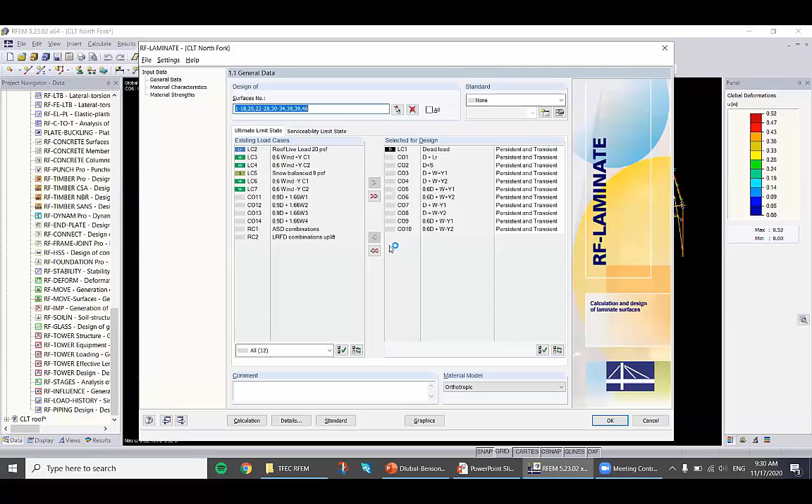I'm going to jump real quick into the module. Amy was talking about that before. I'm just going to go over this from a real-world example that is standing in Long Island as we speak. So what we used is a Nordic CLT in this case. It's from Quebec, Canada. They use black spruce, very small dimensions often. They have very small trees, but they glue it all up into big beams and CLT panels.

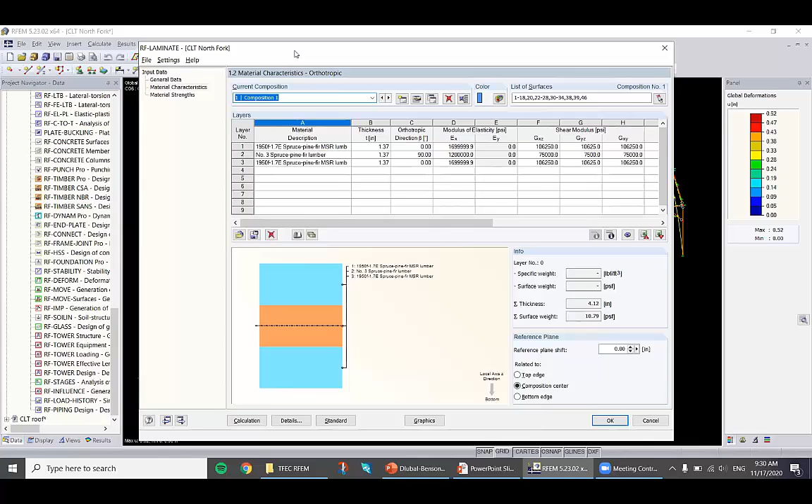In this case, we weren't so much interested in the actual span capacity. There were rafters in the roof, as you saw in that one picture. So the span was really not the main focus. It was more the focus on building this into a nice diaphragm. So a simple 3-ply was good enough.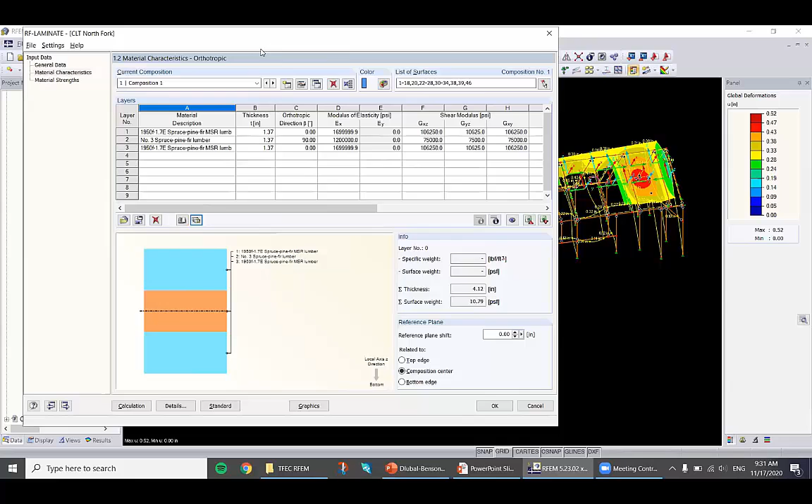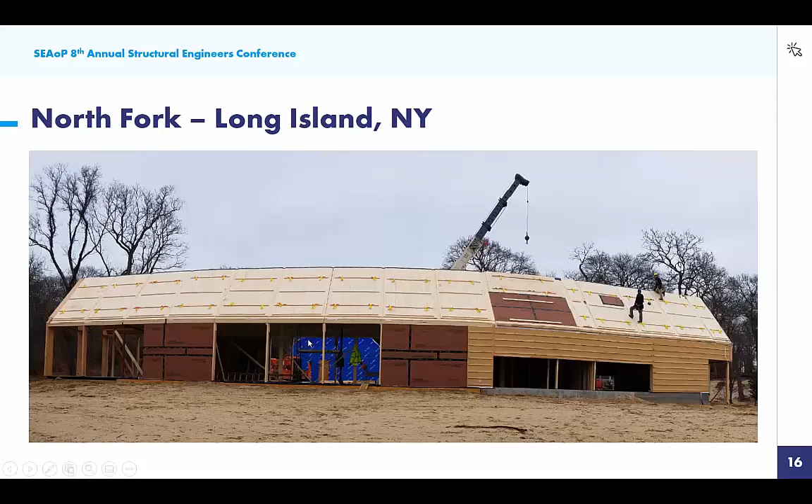Yeah, so that's how that module works. I don't have results in here right now to show. I'm going to go back to the presentation. That's what it looked like on site. You can see the CLT here. Those are the actual CLT panels. They were on the inside. Insulation was on the outside. Yeah, and that's the great open space that they were looking for, and that we were able to achieve without the use of too much steel, and definitely without moment frames.

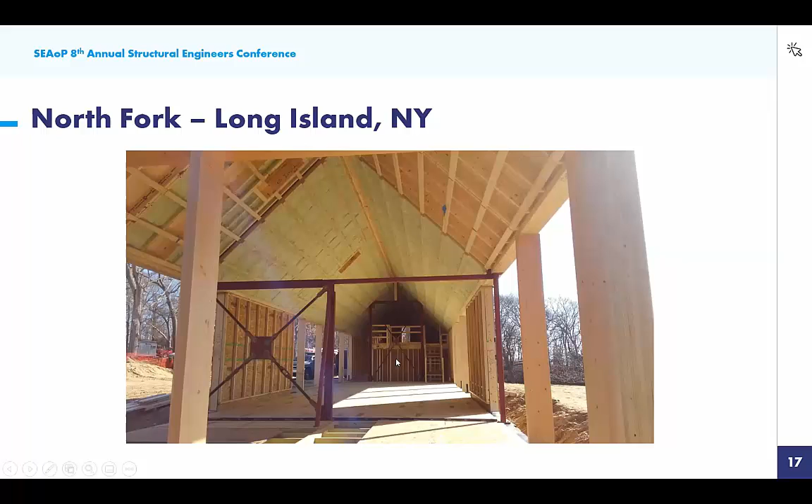Someone might ask, why would you need CLT for that? That's a good question. It's not necessary. It could have been done with sheathing as well. But I personally wouldn't have felt comfortable doing something like that with just, I don't know, 1/2-inch OSB sheathing. The forces were pretty high, and I don't think that would have been a good solution.

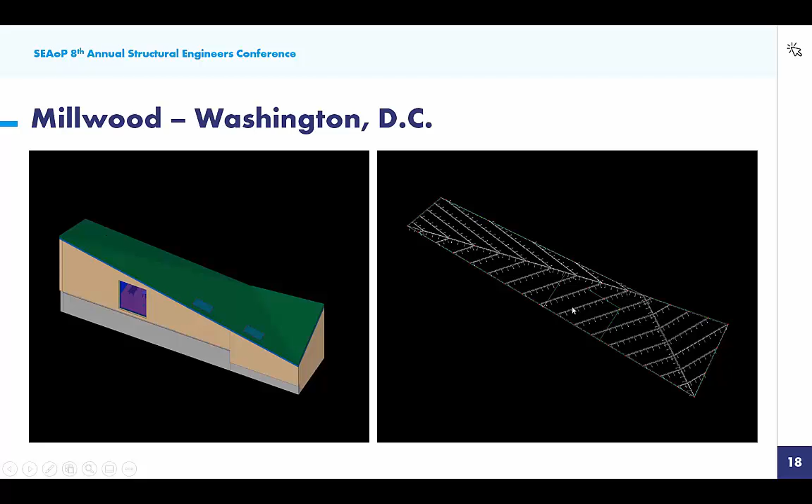This is another project. We never got to build this one. Unfortunately, it was just a concept. It's in Washington, D.C. And the architect was looking for, again, some kind of a folded roof structure that was self-supporting. This is the CLT, the RFEM model. We decided that CLT would be the easiest way to do this, again, due to the biaxial bending capacity and the high shear capacity.

So we were able, sorry, I should mention, so there's support all the way around, and then there's these two interior supports that we couldn't do without. So there's a wall here, and then there's two more walls over here that hold up the roof. But everything else, there's no other supports in there. And we were able to prove that it's possible to do this with CLT panels.

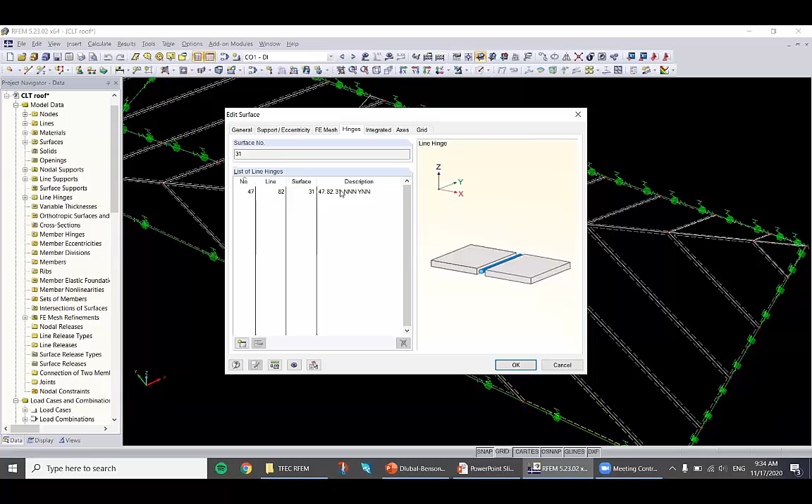It's essential to break up the model into actual panels, like the actual panel width, so that you can model the edge correctly from one panel to the other. Since this was only a concept, we did not go so far and define the spring constants for the connections there, but definitely create a moment hinge at the panel seams.

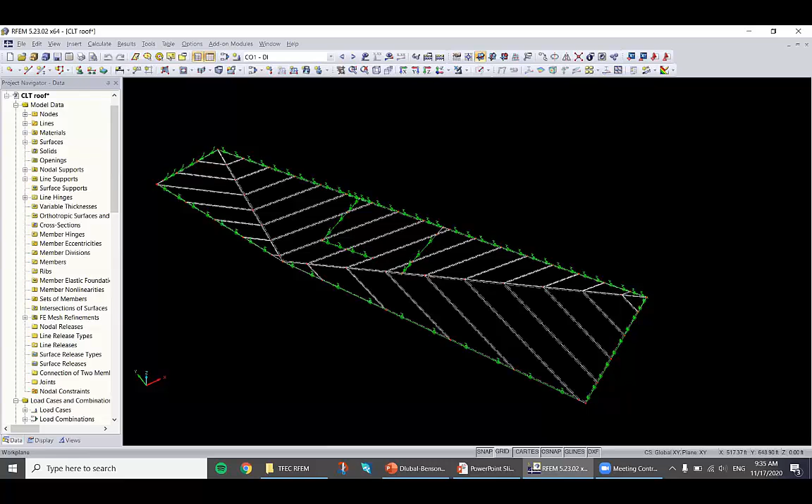Again, there's no beams in here. It's just supported by the exterior walls and those two interior walls. And I'm not sure how to do this without an FE software. Maybe it's possible, but it's definitely way easier to do something like that with a program like RFEM, where everything is predefined.

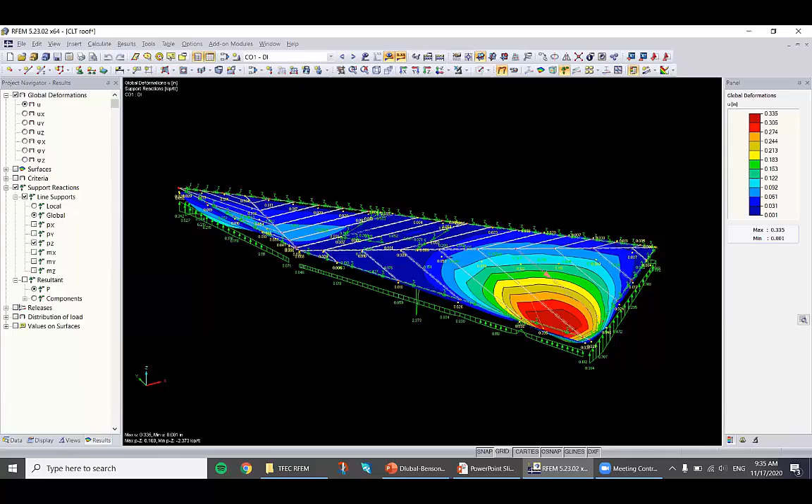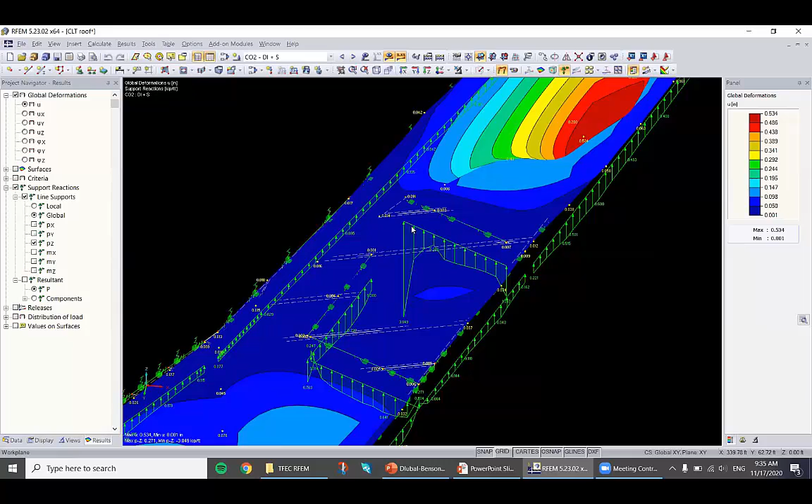This is the dead load deflection. The dead load and snow deflection is 1/2 an inch, and then as you would expect, you get these load spikes here, and there certainly would be more analysis necessary to look into those locations, and I'm very happy to hear that there is an average region available now. I did not know about this, but that is definitely something that will help a great deal resolving situations like that.

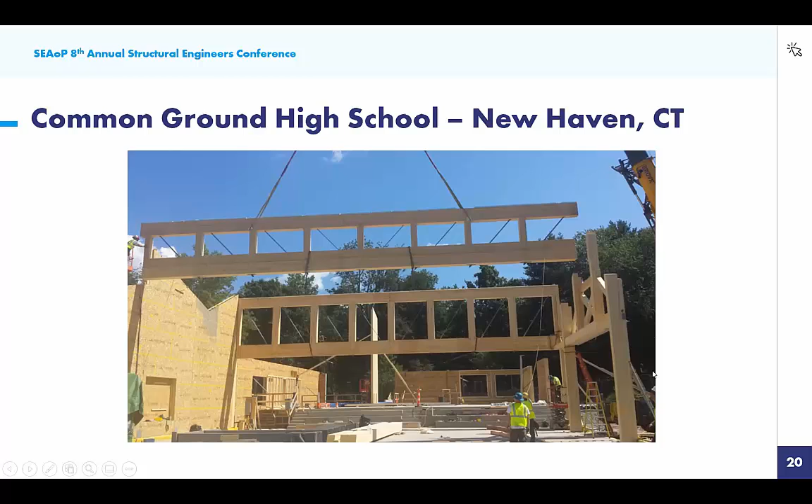This is one of the CLT applications. So what you're looking at here, this is a CLT panel, and then those are I-joists. It's a very long span, and neither the I-joist nor the CLT on its own could span that far, but combined, it was possible to span that distance. You can see there's a lot of screws in here to create a shear connection.

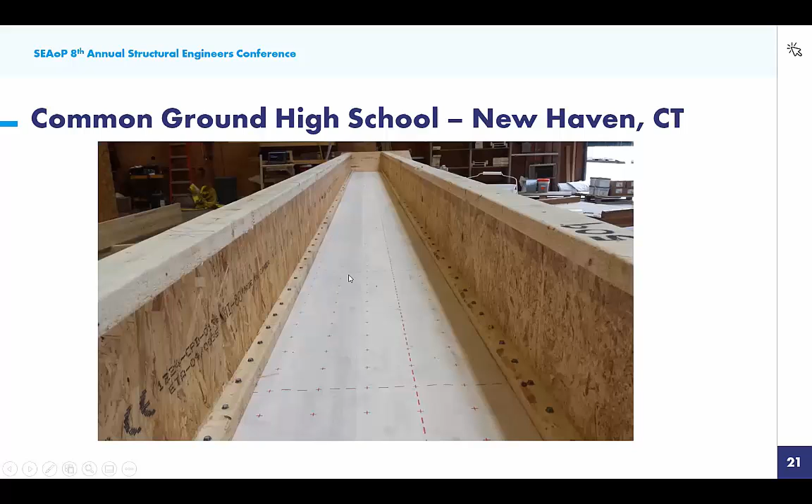Unfortunately, at the time, we did not have RFEM yet. And so there was a lot of hand calculations and probably some extra screws to be on the safe side. With a software like RFEM, this could be done much easier, and deflection results are way more accurate doing this with an FE software.

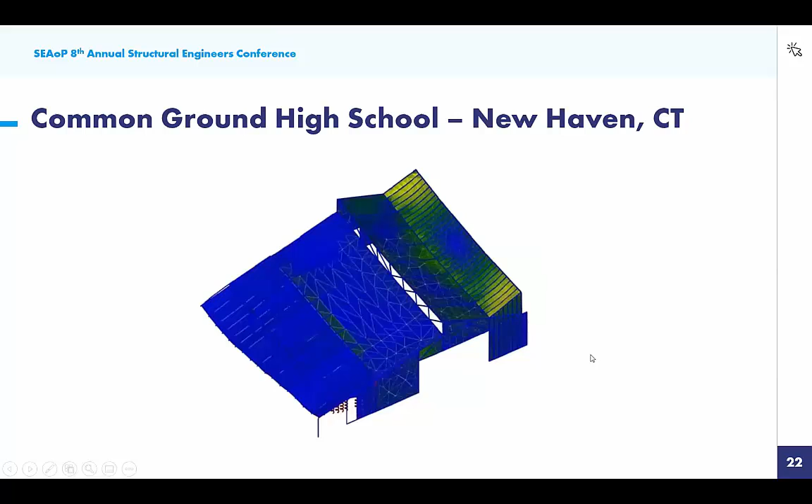This is the model that we used at the time. That's a visual analysis. We did again use some diaphragm action here to hold up the roof. It was not quite as extensive as on the North Fork project, and in this case it was only sheathing. The sheathing was OSB, like 5/8 or 7/8, and it would have been better to have a program like RFEM to really get the full potential out of the mass timber.

It's not always possible to get the fire rating out of the CLT as it's needed for an elevator shaft. I think in this case as well, gyp cladding was necessary to get to code. But we still think that it is a good investment to use CLT for something like that. One reason being is material consistency.

There's a lot less coordination necessary if there's just fewer trades on the job site, and whoever builds the rest of the structure can provide the elevator shaft as well. It's much faster installation time. And of course, there is the advantage of the carbon sequestration. As we all know, CMU, or really any other building material, produces carbon, whereas wood stores carbon.